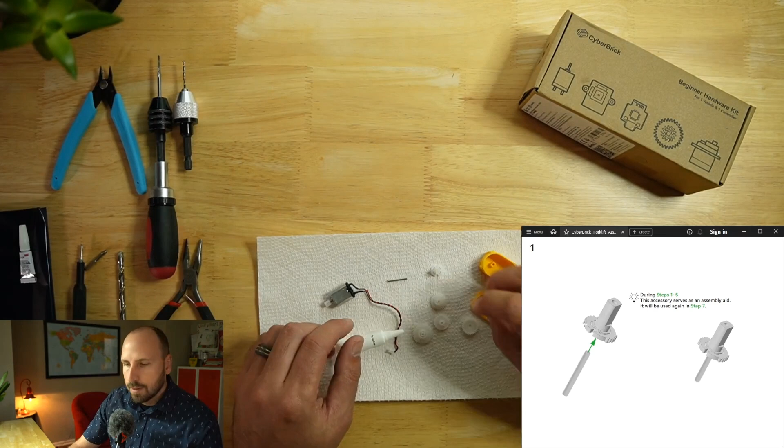Okay, we'll get started with the gearbox here. So the first step is putting together a couple of pieces. For one, we start by using this aid, put a little pin in there, and we can make sure that we completely seat this rod in the hole here in the gear shaft.

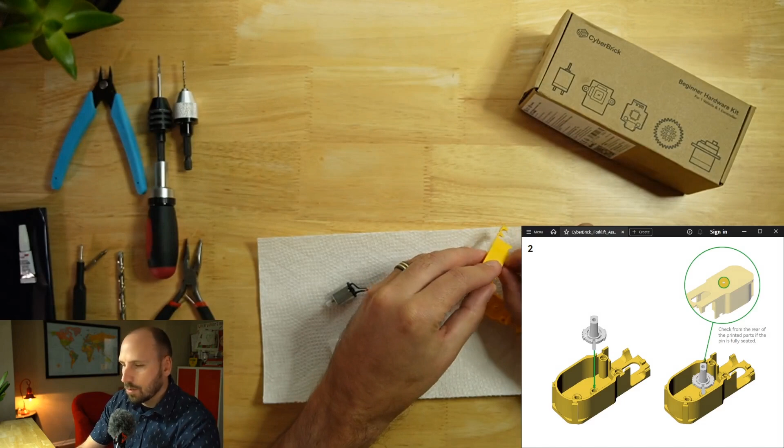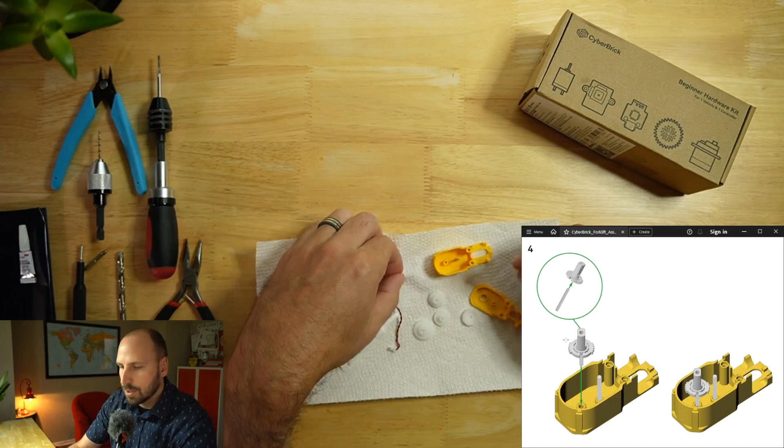Now what we found out is that it doesn't quite fit in there very well, so what we do is take this M2.5 drill bit here and drill in just a little bit. You don't want to go too far and drill all the way through. If you go all the way through, no big deal, it'll still work. And now we can also put the shaft in the second hole. This one, for whatever reason, wasn't quite as tight, but there we are.

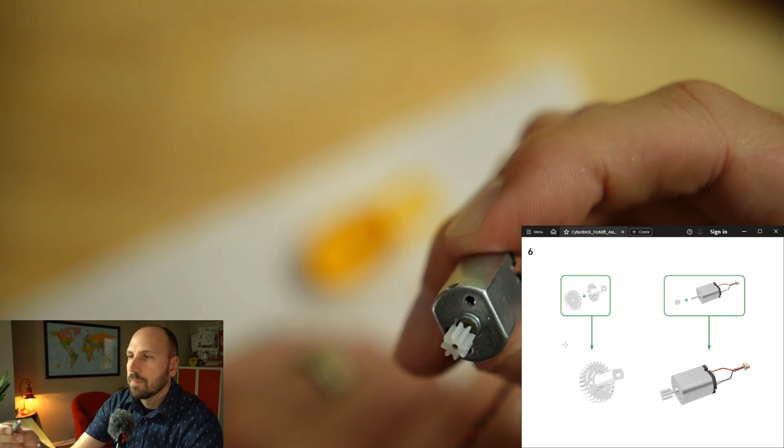Now we can put this gear that we were using earlier, we marry that up with this gear, put it together, it just fits in there. It's a bit of a friction fit. There we go. And then we have our motor, which I got ahead of myself and already put the gear on the end of the motor. It does help to just put it on the table and smash it down a little bit to get it in, otherwise it's hard on your hands and your fingers.

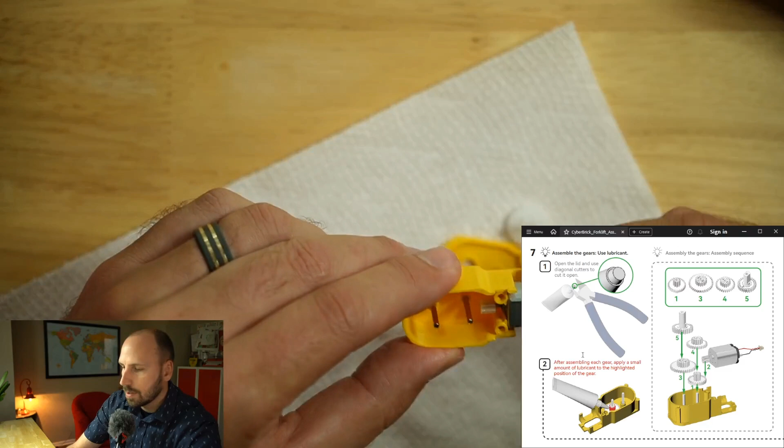Going on to step 7, we have our lubricant, and so we can start assembling this motor. So the first thing I do is put the motor in there, and then with the lubricant that comes, I just put a little dot right on the end of the gear, and as the gear turns, it will cake around the rest. This gear actually should go in first, it looks like. So take that back out, put that gear in first, then we will put in the motor, then we take the larger gear and slide it in.

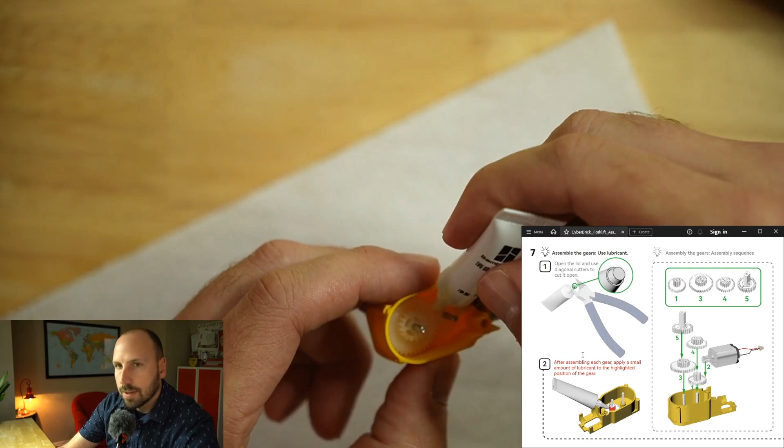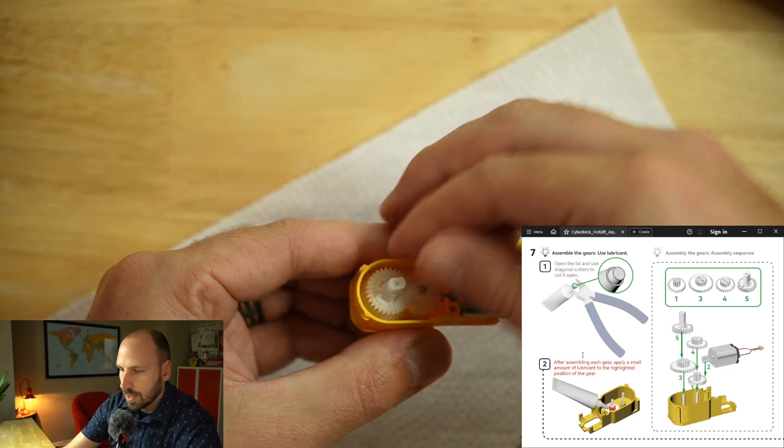And while these two gears are exposed, we'll take this grease again and just put a little dot, I know it's hard to see, wherever gears exist, just to make sure these are lubricated. This is a very important step, don't skip it, otherwise you'll end up having a seized motor. Okay, then we take the smaller gear and put it in there next. There we go. And then lastly is this taller gear, which goes on the last remaining shaft. And then we can just, again, put a little bit of grease right between the gears. That will work its way around as soon as we turn on the motor.

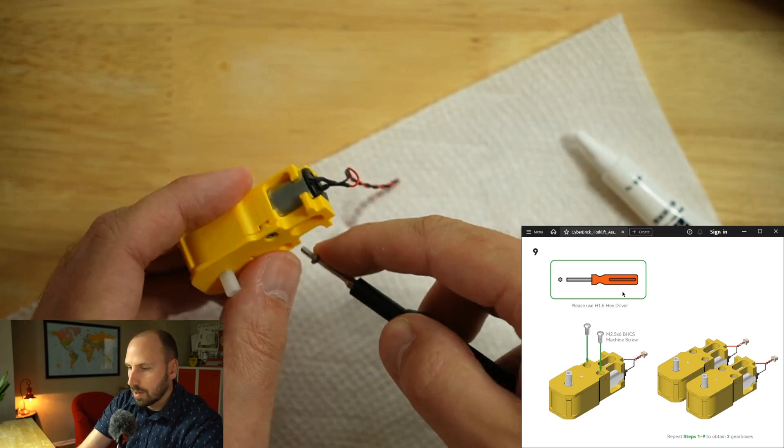Now we're going to go ahead and put the cover on here. It fits pretty snug. And then lastly, we take a couple of screws and seal that all together. We don't have to tap these holes with our M2.5 tap. The designer of this model did a very good job, to where we can actually just use, in most cases, the screws directly into the holes. There are only a couple of spots where I found it useful to tap, and we'll get to that in a second. Just tighten it, finger tight. We now have 2 gearboxes complete.

So moving on to the next step, which is the vehicle body. Starting with the chassis here, we'll go ahead and put our 2 gearboxes in. And what I find is that if you over drilled, like I said, that center shaft, it's blocked by this center support in here, so no big deal. Just seat these in here nicely. Again, the developer of this model did such a good job that the tolerances are just about perfect. Can get that settled in there.

There we go. On to step 11, we will take our top part of the chassis, and the idea is to route the wires for those two motors out through the sides here so they can just come out to the top. And then we put a bolt right down in the middle, and that's going to make sure that we have the top attached to the bottom.

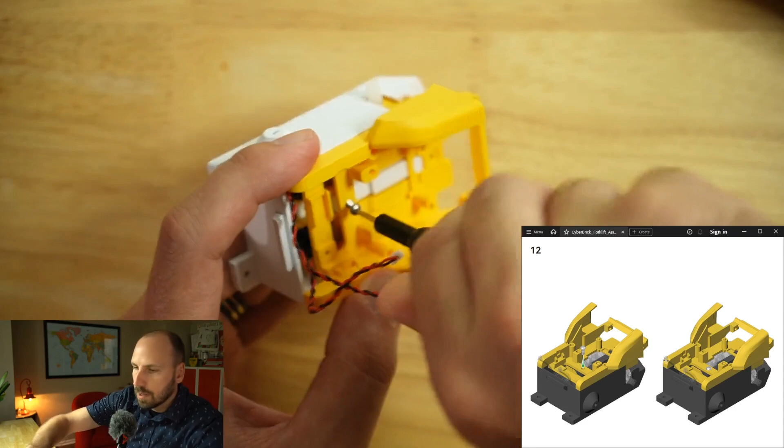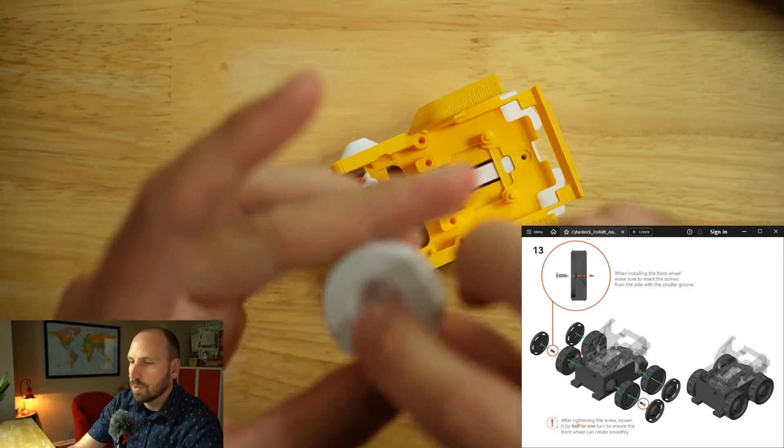Next step are the tires. Okay, get these over here. These are really cool. Each tire comes with a hubcap and wheel. They're slightly different styles. You'll notice the back of one has a large hole in it and the other one has a small hole in it. The small hole is going to go on our gear shaft, and then the one with this larger hole is going to go on the front.

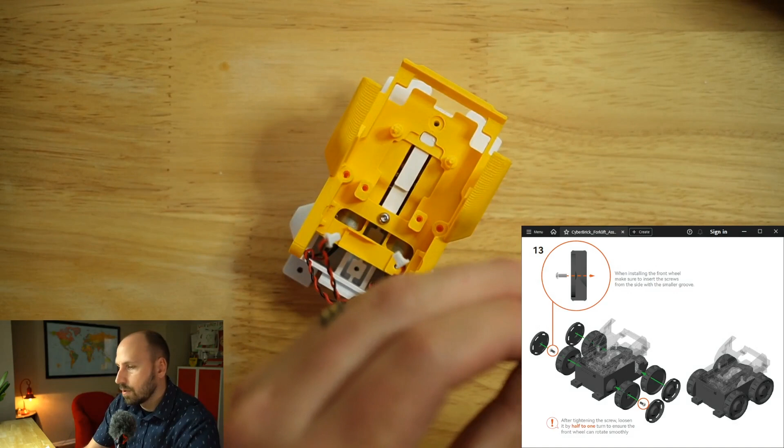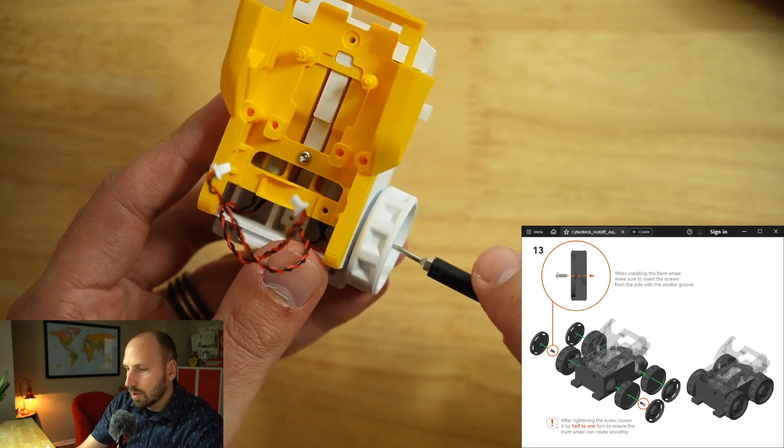Now those get attached with screws. So if we take a screw here and we take the one with the larger hole, we can put that screw through there, and we go ahead and tighten that onto that portion. So you tighten it up, and if you tighten it up too much, the wheels won't be able to turn. So the idea is to back it off. They say about a half to one turn. You want it backed off just enough to where the wheel doesn't wobble, but it does turn freely.

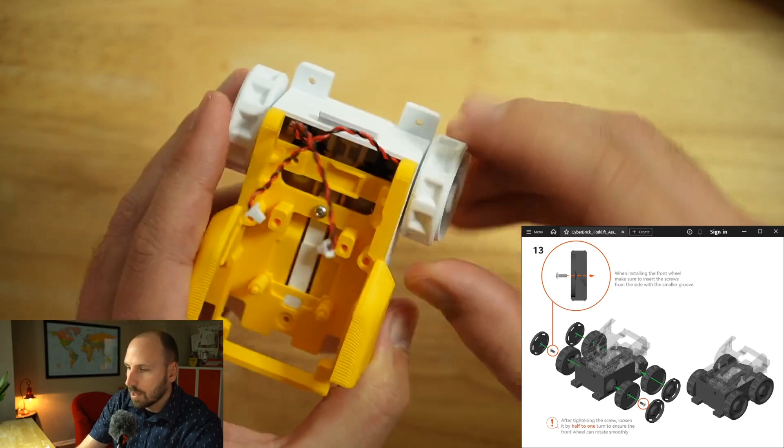Okay, we'll do that with the next tire. Okay, and then what you can do is put the hubcaps on, once you're content with how easily those tires turn. There we go. Nice and easy. And look at that, those just snap in like that. It's pretty amazing.

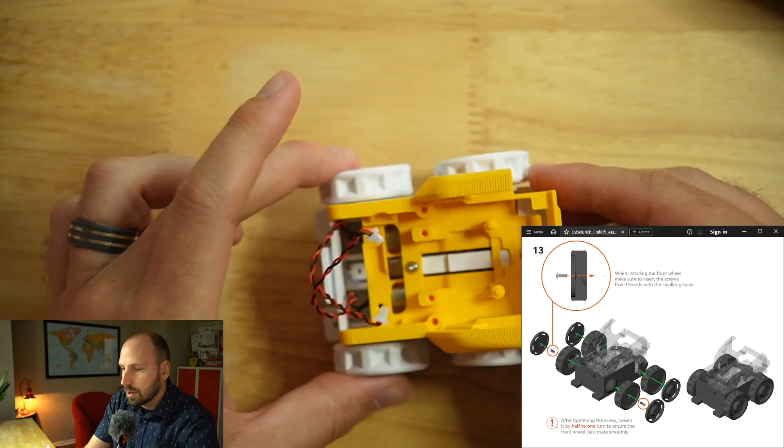Now if we look at the back pieces, same thing applies. We have this hole here, and if I push those in, you see we have the tires. We don't need the screws on the outside of those, so they just pop on like this. And they're just friction fit in. Again, incredible job with the tolerances. So now we have our front wheels and our back wheels. Now's a good time to just turn each one of those back wheels nice and slowly, just to lubricate all those gears inside the gearbox before we turn them on super fast.

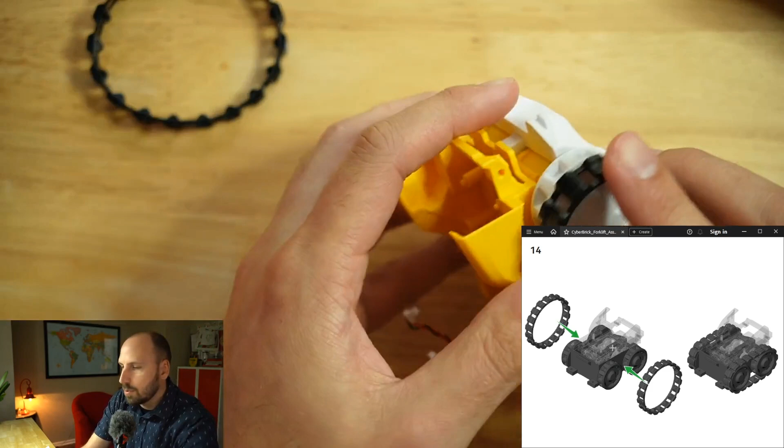This is the TPU treads. So if you don't have TPU, or if you haven't printed with TPU before, it can be a little finicky. I'm using the AMS TPU from Bambu Lab. It prints it off really nicely overall, but it is a bit stiffer than some of the other TPU that I've used in the past. So if you put it on the back tire, you just rotate the front tire a little bit, and then it seats in. So there are our treads.

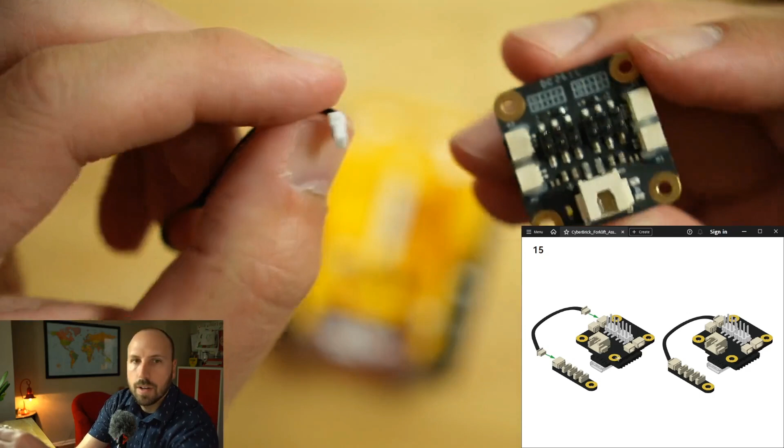Next step, we start talking about some of the electronics. So in this case, we have the receiver module, and we have an LED bar. This is individually addressable LEDs. So first we plug that in there, and then to the receiver bar, we plug this in to the side. It's really important to get all those connections to the right spot. Otherwise, you're going to find that the controller, when you hook that up, things don't function quite the way they should.

Okay, now we have the left motor and the right motor. So first, starting with the left motor, plugs into this port, and the right motor crosses over to the other side and plugs into this port. The open terminals are up, and then the latching piece, the part that latches in, is at the bottom. So they go in there like that. If they aren't going in easy, you probably have it upside down. There we go. Okay. So again, key thing to know, that's backwards on the motors. The left goes into the right, and the right goes into the left.

Okay, so looks like we can seat that down in there, and then go ahead and fasten it with a couple of bolts. Sometimes it takes just a little extra pressure to get those bolts to start threading in. Now if you're having troubles with that getting in there and you're afraid that you might be breaking it, you can take a 2.5 tap like this and just thread that using the tap instead of the bolt. And you don't have to go all the way, just get it started. And then you'll find that putting in that bolt is just a bit easier. Okay, so there is the receiver module.

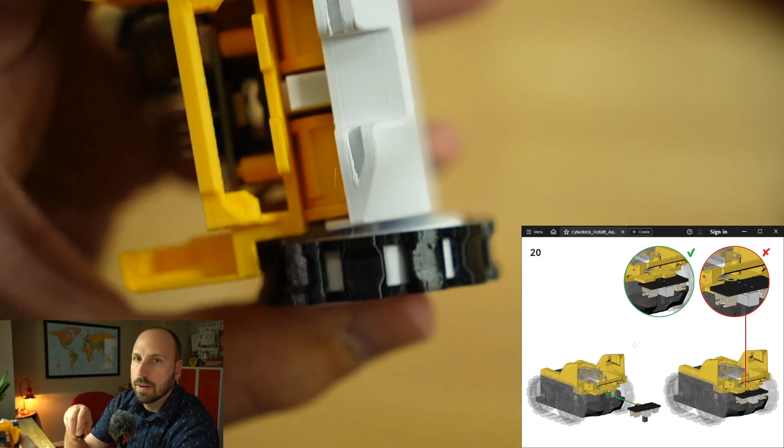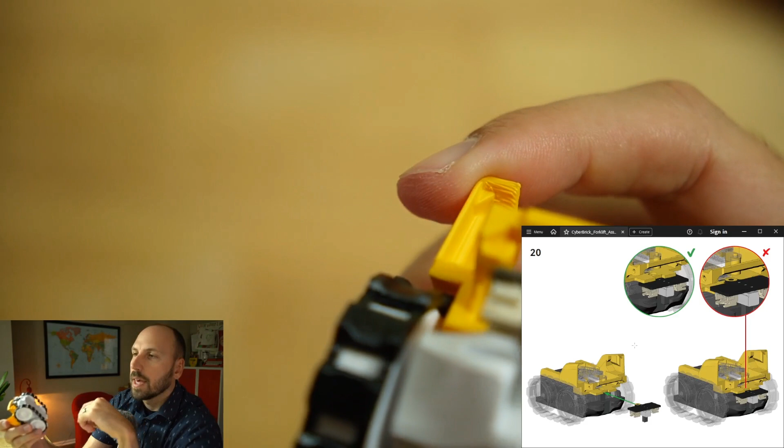Next up is the power. So in this case, you'll see that there's a little gap between the yellow and the white, that little white standoff there. That's where we're going to insert that power switch. And then you can see on the top, you can align that hole just right, and that's where we'll put the next bolt. Okay. Now the off position on the power supply is towards the front of the forklift. So I would recommend not setting it to this position, but instead pushing it to the front so it's off, just so that the unit doesn't power up until you're ready for it to.

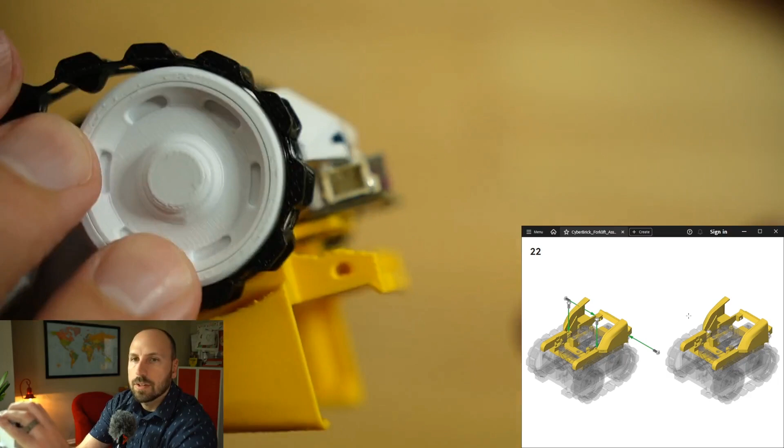Next, we have a couple of screws that are going to go in the back here. Now, if you're ever using one of these kits and they're telling you to put in a screw, but it's not holding anything together, that's normal because in a lot of these kits, they're using the screw as a magnet point, so they can put magnets in other pieces, and then those screws actually hold together a cover or something with a magnet attached. Now, a key thing to know about this particular ask to put a screw through that hole there is that the layer lines are running lengthwise.

And whenever you have layer lines running lengthwise as opposed to widthwise across a hole, you've really increased the chance of a split. If a 3D print is ever going to split, it often splits along the layer lines like this. So if I were to start putting a bolt into this hole here, I would suspect there's a chance that bolt is going to pull apart that layer line and cause a break.

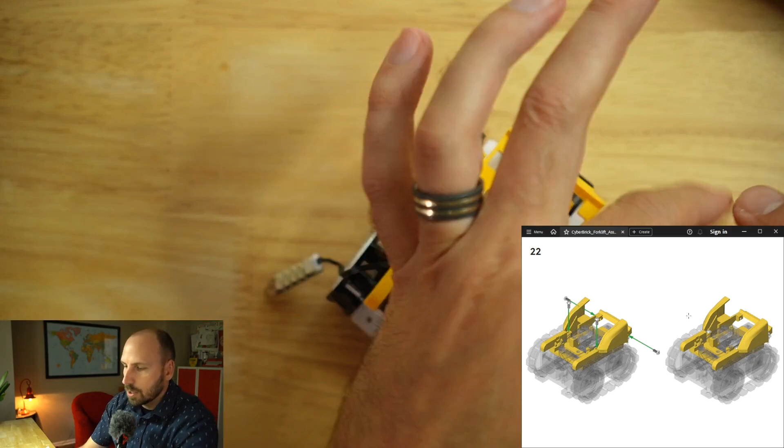And in fact, I did that earlier with a different piece, and I actually had to super glue it back together. So if it does break on you, you can super glue it back together and put the bolt back in there. So what we're going to do is we're actually going to take our M2.5 drill here and just bore out that hole just to make sure that we don't put too much pressure on it.

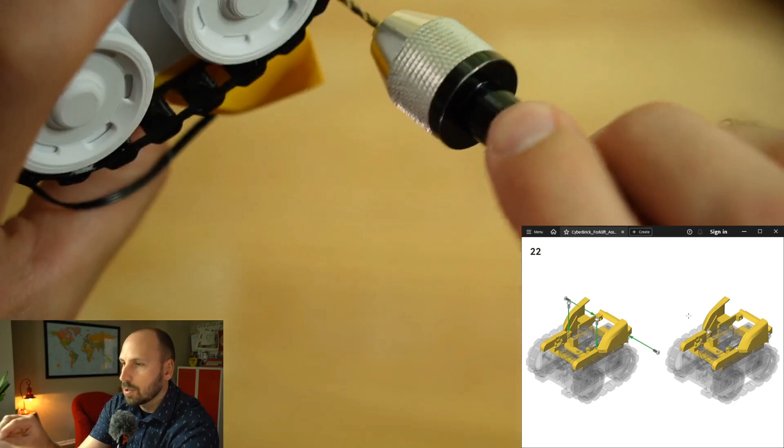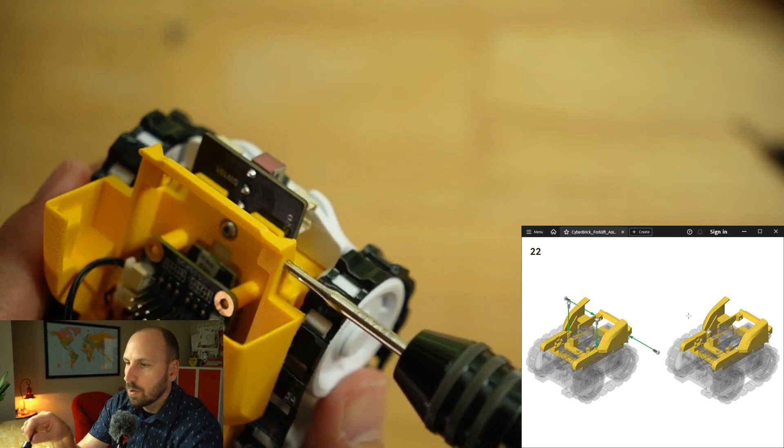And then I can take the M2.5 tap and I could pre-tap that hole in a way that doesn't build up that pressure against the layer lines and cause a split. If you end up splitting yours, no big deal, just super glue it and let it dry, and then try to do it again. That'll work just fine.

Next up, we have the LED lights. Here I've already fished those through there. You just push them through the channel. You have one on the left and one on the right, and you angle those out. Be very careful with them not to pull or push too much on the ends. Pretty fragile. I did not print off the two covers for the lights. Unfortunately, I didn't have any clear PETG, but I think they'll work just fine without it.

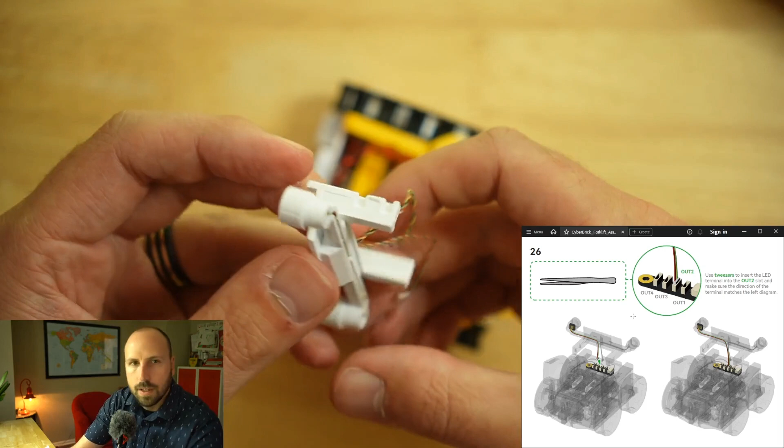The next up is we need to just thread those wires through this piece here. Okay, so let's do this. There's one, there's two. Okay, and it looks like that sort of seats in there like that. Again, just trying to keep track of which is on the right, which is on the left. Maybe I'll just wrap that around like that for right now so I can keep track of it. And then the next thing is we put a bolt through this hole in the back. There we go.

Next up, we connect our LEDs up to this LED board. So it looks like the LED board is going to fit in like this. And if we match the orientation, it looks like the LED on the left goes into slot 2, and I suspect that means that the LED on the right goes into slot 1. Okay, so those do line up appropriately.

So again, these are only going to go in one way. They do recommend using tweezers to put these in. If you do that, just be very careful not to squeeze the wires. The wires are quite delicate. Might take a little bit of trial and error to get it in. Okay, so here this is a bit of a tricky spot. I guess this just goes in here for right now.

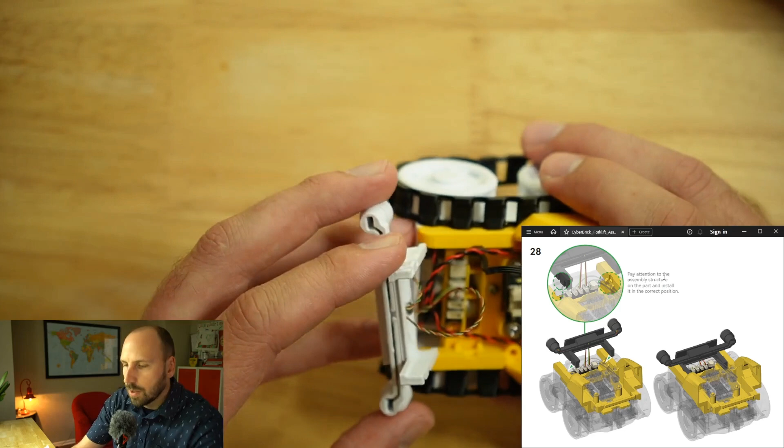So the LED lights, you want to point them forward towards the front of the forklift like this. And then you'll notice that there are little slots in this white part. And then there's a little slot in the yellow part here. You want to line those up. And then this piece just clips in, kind of like a seat belt. So you can see how that goes in there.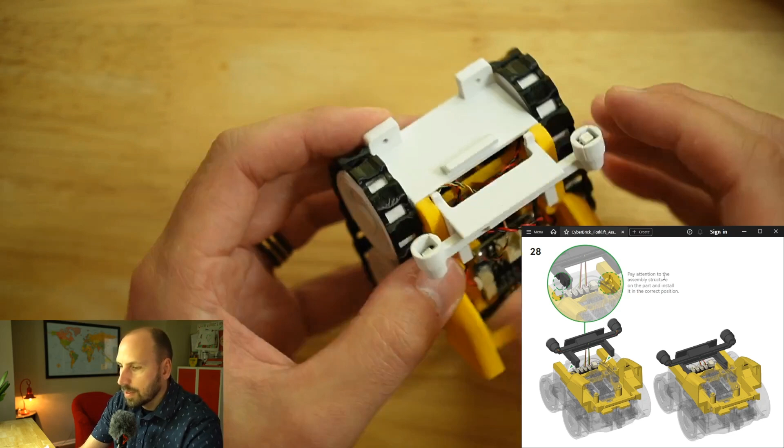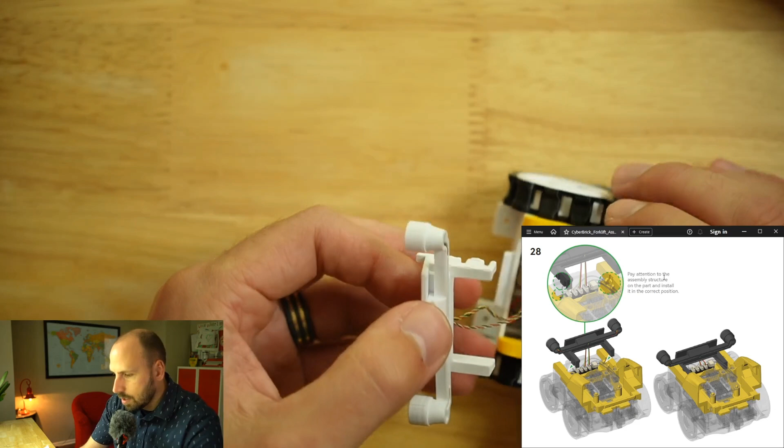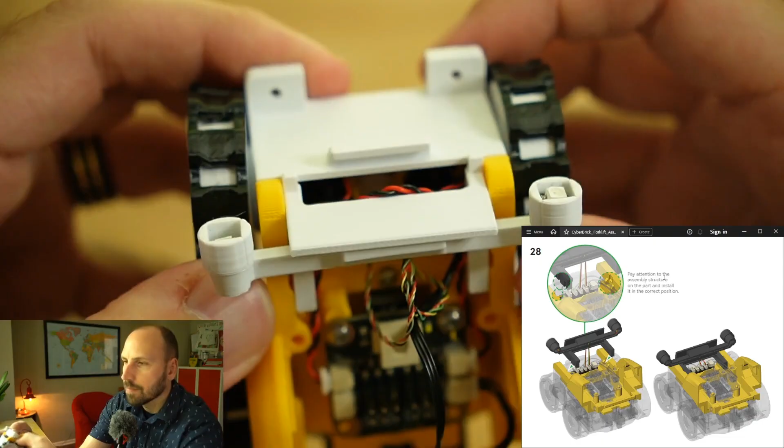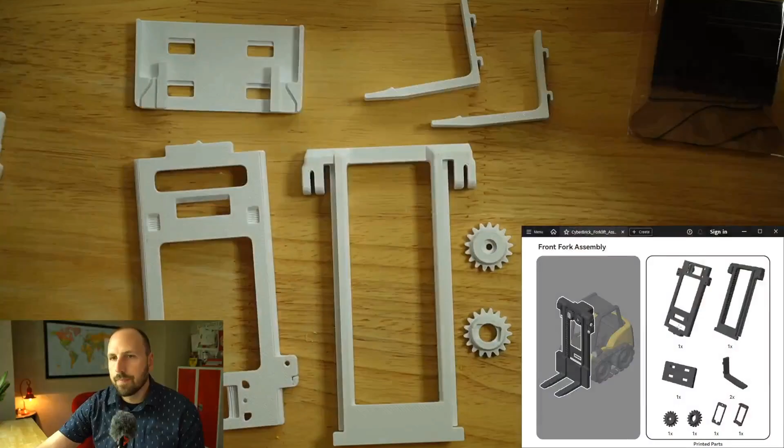Next up, we're going to assemble the front fork assembly. And one key thing to know there is that there's two different types of servos that came with the Cyberbrick kit. One servo is a regular servo, just says 9-gram servo motor. The other servo is a 360-degree servo. We want to use the 360-degree servo. So make sure that's the one you're using in the next few steps.

I'm going to take these two pieces and click them together. This is just a friction fit piece. If you have trouble getting those in there, this is a good time to use the needle nose or another pliers just to get that seated fully. So I'm going to get that to where there's no gap in there.

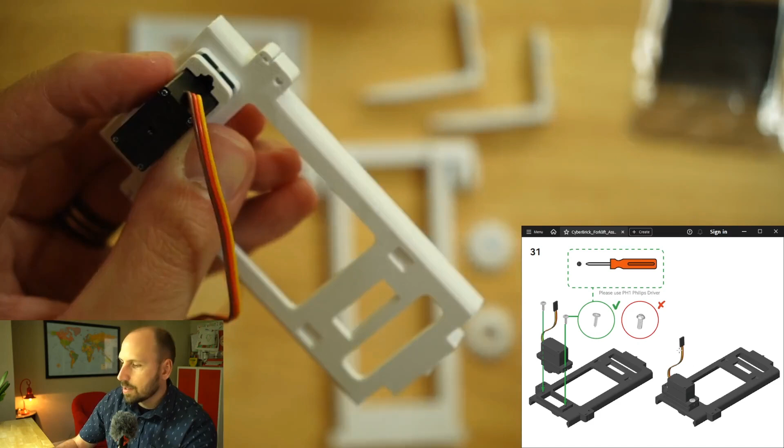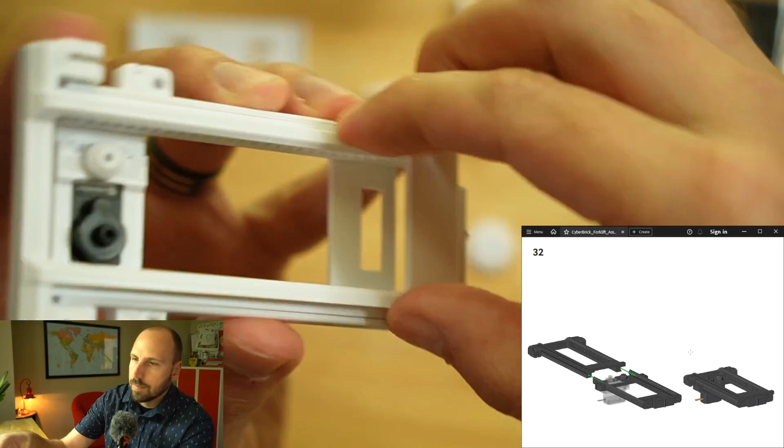Okay. Next up, we will take our servo motor. The servo does come with some screws for tapping. So you can put those in there, and then you'll need to use your Phillips head screwdriver to get those in there. Next up, we will take our longer assembly arm and we slide that in from the servo side down. It slides in just like that. From there, in your servo kit, you will find a servo arm that looks like this.

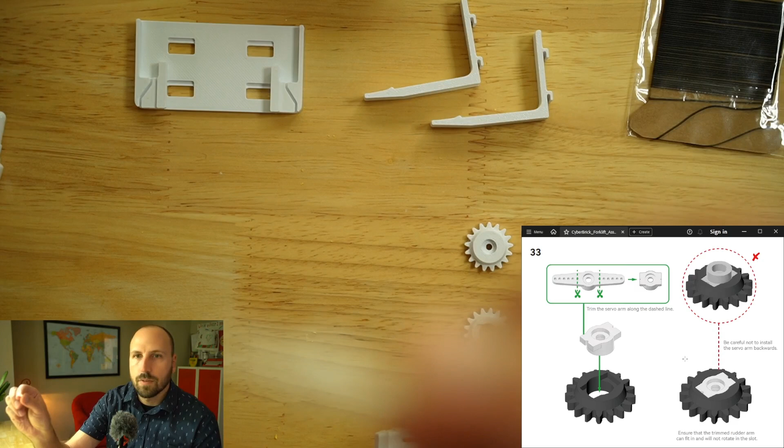What we're going to do is we're going to take our cutter and we're going to cut that very first hole off. So if I do that on both sides, and then you take the gear with a slot in it and you just push that together, and then you end up with that little plastic piece wedged into that gear.

Okay, next thing, we go ahead and mount that on top of the servo. You can press fit that in there. And then again, the servo kit came with a small screw. You can use that and go ahead and use that Phillips head screw to attach that gear to the servo. Okay, so there's the completed

servo install. We have the other gear here that we meshed together, and for this we do use a normal M2.5 that we've been using the rest of the kit, and our H1.5 hex bit. Go ahead and tighten that gear down. Now this gear we want to have loose but not too loose to where it wobbles. So I tighten it up and then I loosen back just a little bit to where it's free to turn but not wobble.

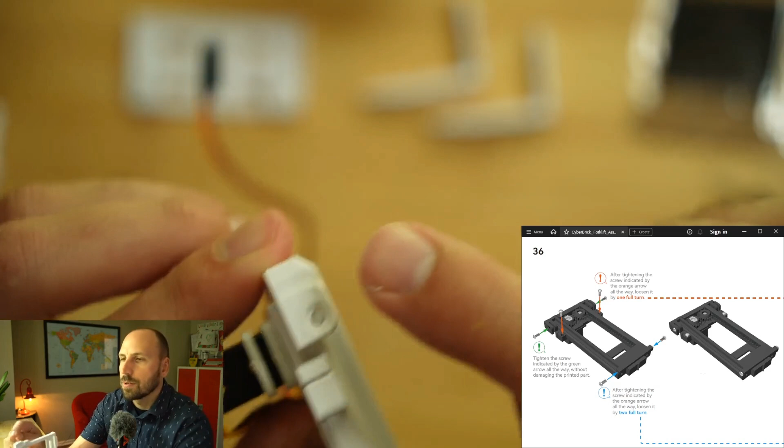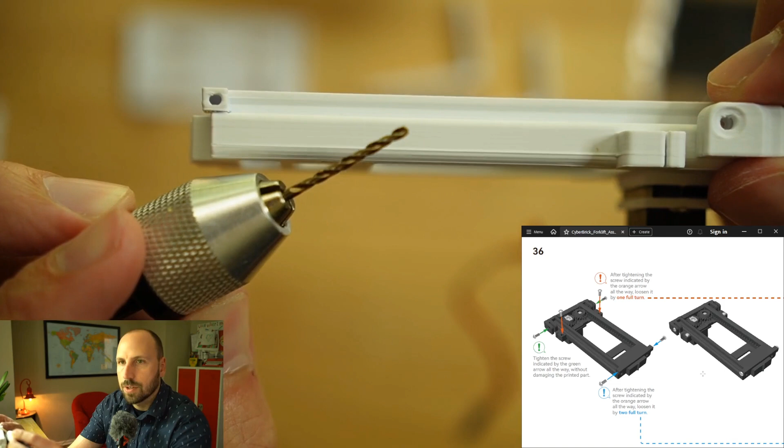Alright, next up we're going to install several screws throughout the assembly here. We have a screw that goes in here, these two holes, as well as these two holes down here. Now again, as I mentioned earlier, these are going against layer lines. So when we put something against a layer line, I almost always use my M2.5 drill bit and just make sure that there's no external forces. So I'm going to go ahead and install those. Okay, so for each one of these, make sure that those are not going to strip out or break the layer lines.

And on this here, you just tighten it up to where it stops. We're going to put some thread through that in a minute. Same with the other side, we're just using that as an anchor point for thread to route through. Leave a little gap in there so that we can run some thread through it. Same with the other side. And then leave a little gap on the screws here at the bottom as well. Just a little visible gap there, maybe about the size of the head of the screw or the bolt.

Next up is some nylon thread. So we open up this and it says to do about 30 centimeters long. You do not need to be exact with that. Basically that equates to 3 wraps of this. 1, 2, 3. And then I'll cut another strip. 1, 2, 3. And it says to tie a knot at the very end of each piece of thread. So we'll do that like so for thread number 1, and then we'll do that for thread number 2.

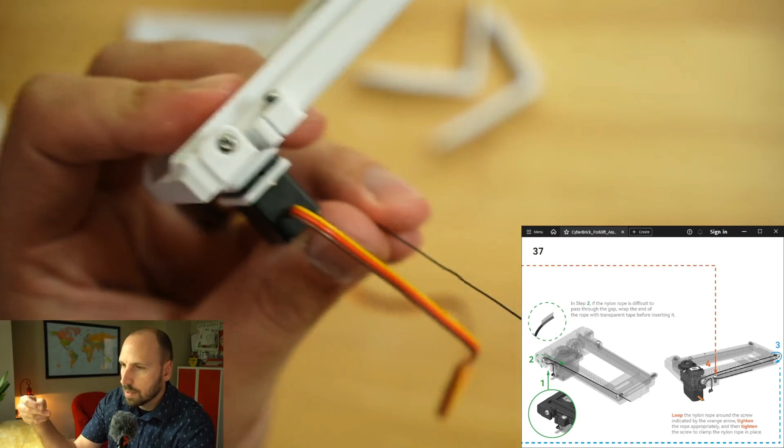There we go. It looks like that part with the knot goes there, and then we're going to actually thread the other side through this slot here, pull it out the other end, and then we wrap that around the bottom and then back up around this bolt. And if I can manage to get it on the inside without binding that other thread there, that's how it unfolds. And that's where you see we had plenty of extra thread on here. And then we can tighten the rope, just hand tighten, and then we can tighten this bolt to hold the rope in place.

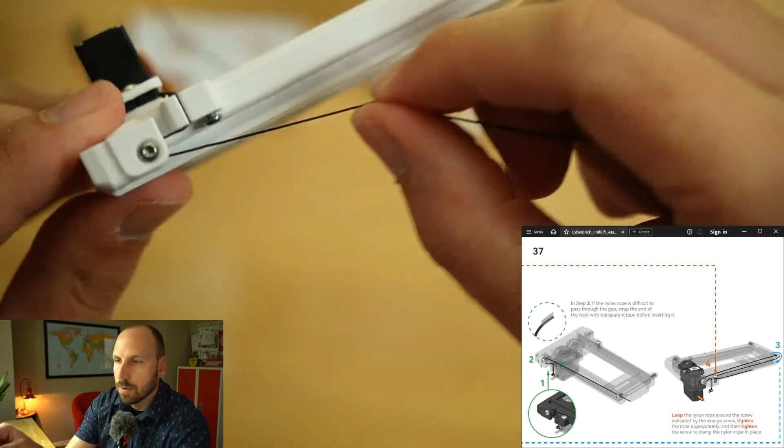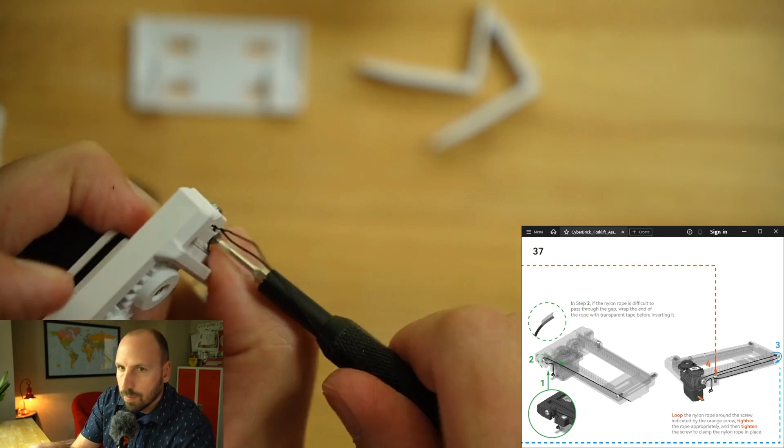Okay. And we'll repeat with the other rope. So if we go through here and then around the back side through the front, then we go down the front and back up and around this bolt. It's a little tricky to get that wrapped around the bolt. I think if maybe we loosen it up just a little bit, it'll be easier to get underneath the head of that bolt. There we go. Okay, and then we can go ahead and tighten that bolt up. If you tighten too much, you might tear the thread, but that's now both sides assembled. And then what we can do is use our flush cutter to clip off the extra thread.

Now we do the front fork assembly. So if we look at the assembly here, we don't use the back side of it, we use this side here. And then it looks like the forklift tines go through like that, and then they can snap in just like that. Then it asks us to, again, orient the set like this. Then this has these little hooks on either side of that forklift trolley, and those just snap in to either side of the

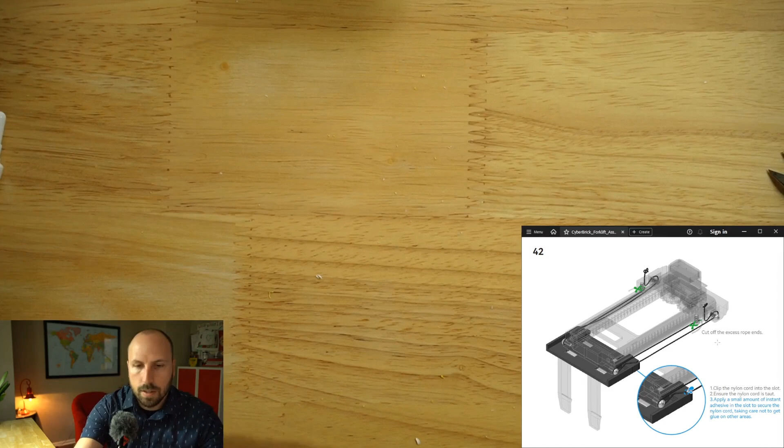lift assembly. And it says to push the fork all the way down, and then those wires that we had earlier, we will actually take the wire that's running up to this bolt here, and we're going to run that through this little channel, just like that. Same with the other side. And then it says to use a little bit of super glue to keep those together.

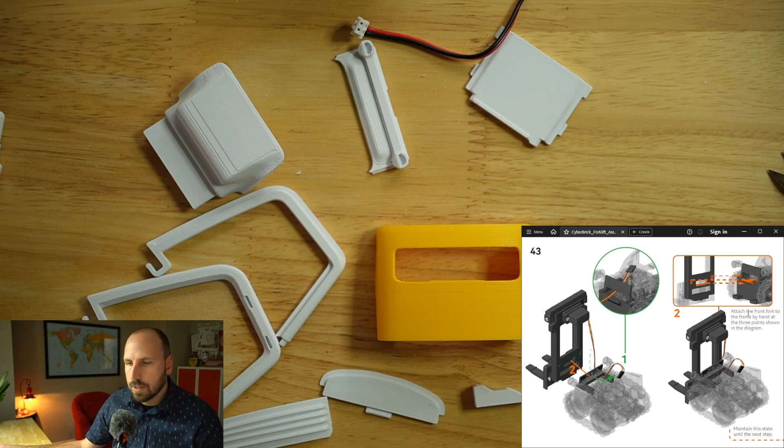So with super glue, I always put something on the table to protect the table. And then we just do a little dab of super glue in each side, just to hold that cable in place. Again, make sure you have that forklift assembly all the way to the bottom, and then we'll let that super glue dry.

Okay, so the front fork attaches and runs through the hole here. So if I take this front fork assembly that we just finished, and I take the servo piece, I just run that through this front, up and over that LED junction, and run it the rest of the way through. And then I could take this front fork assembly, and you can see how there's a hook on the front of the vehicle and a hole in the fork assembly. You can just slide those together like that.

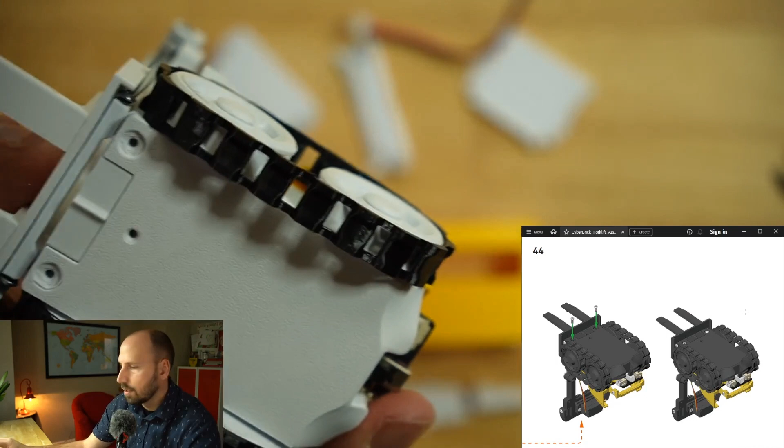And then we'll end up holding that on underneath with a couple of bolts. So put those in there. 1 and 2. There we go. 2 bolts in the bottom. And now our fork assembly is locked on there.

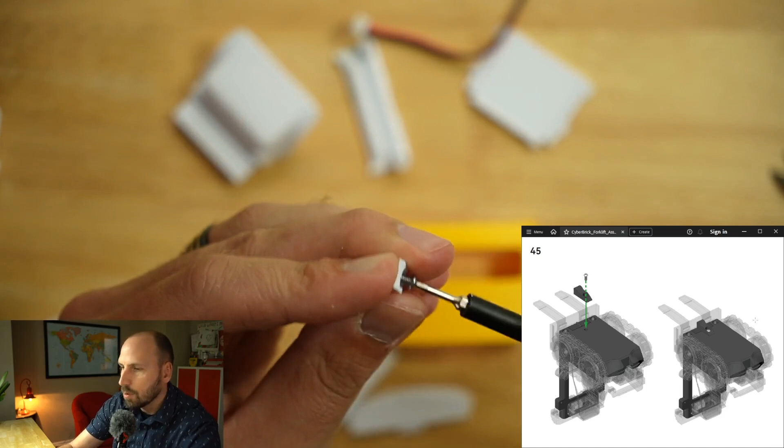And lastly, we have a piece that I think is for preventing the forklift from tipping too far forward with a heavy lift. So we can put that on there as well. This helps to have 3 hands for, but we'll get it in there. So it just screws onto the bottom. Nothing fancy. Again, I think that just keeps the forklift from tipping forward.

Okay. Next up, we connect our servo. So the yellow wire goes to the back right spot of our control board. Okay, next up, we're going to route the power wire around. So we'll plug one part of the wire into here, into the front of our circuit, and then it says to route the other wire down and around the back underneath this piece of the kit right here. Okay. And then we're going to plug that into this side of the harness. Okay.

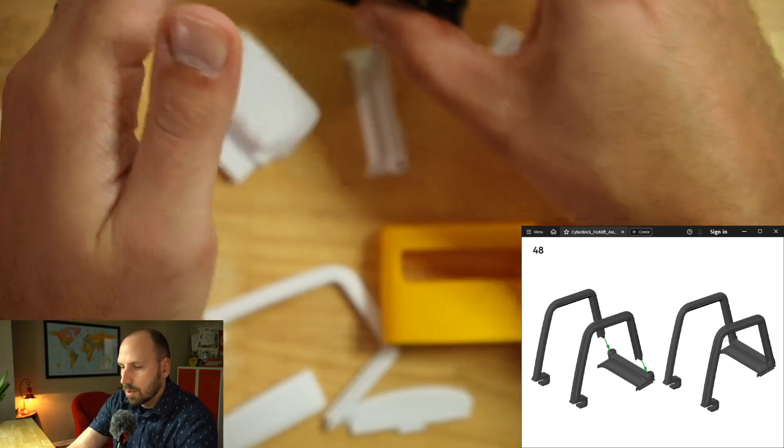Next up, looks like we're going to assemble some of the cab. So we start with making sure that these little slots are on the interior sides of the cab. Then we take our back piece here and, look at that, they even designed it so you can't click that in the wrong way. Friction fit is just amazing, where things just go together. You don't even have to have glue on them.

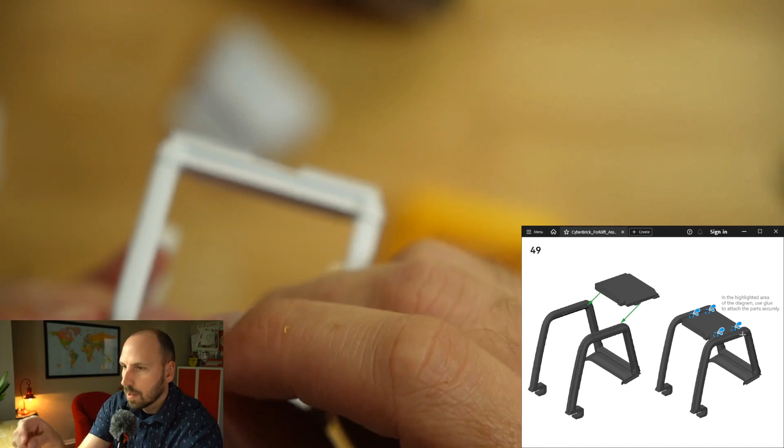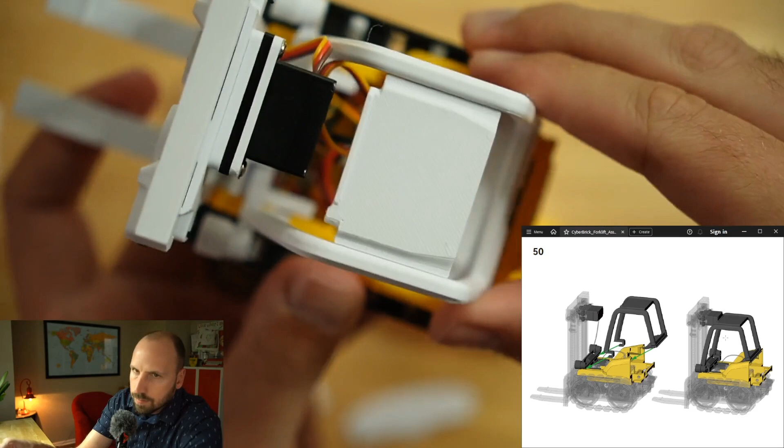Okay, then we put the top piece in. This one we will use a little bit of glue. Looks like this piece with the bump goes towards this side. Okay. And we'll put a little bit of glue on those pieces. Okay, and we'll hold that together. Next up, it looks like we install this onto the top of our structure here. It just slots in there on the back, and then the front. See how that just clips around that light bar up there on each side.

Okay. Next up, we have our electronics cover. So this cover is going to go over that centerpiece there. You'll notice they're asking us to put a couple of magnets using super glue into those 2 holes. Those 2 holes are going to line up with those 2 bolts that we put in there earlier. And that's actually how the cover stays attached. So we'll go ahead and put those magnets in there and glue those in. Okay. There's the 2 magnets installed.

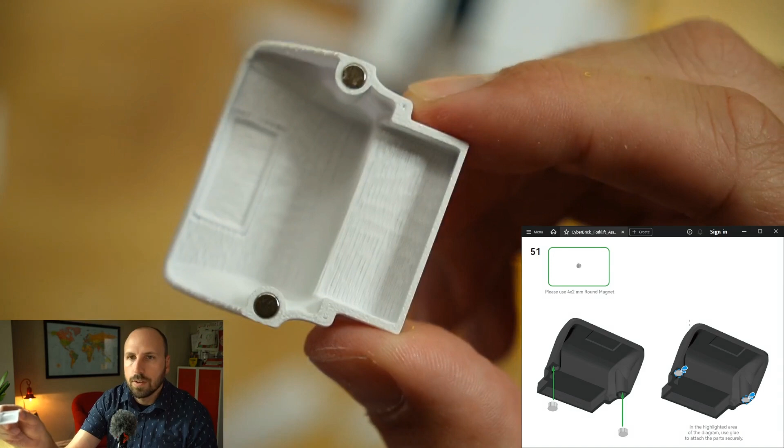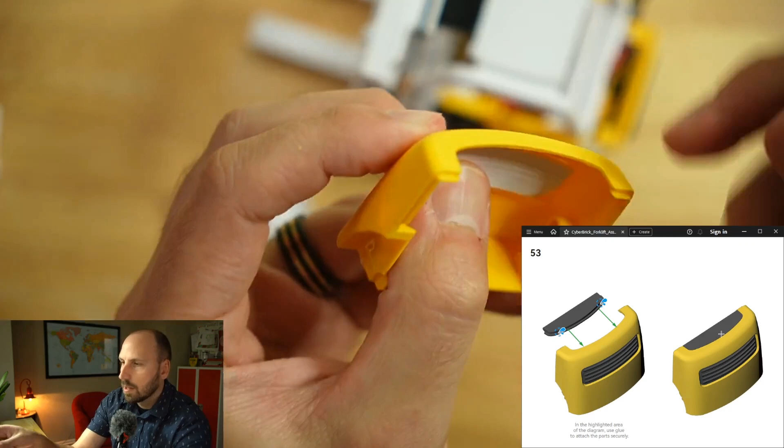And then we'll do a little bit more gluing. We're going to take this back shell and this piece here, and install them into here. So we're going to take this like this, and then this like this. Put a little bit of glue on that. So we'll glue those in. Okay, so now we have those glued in there. Nice and tight, nice and snug.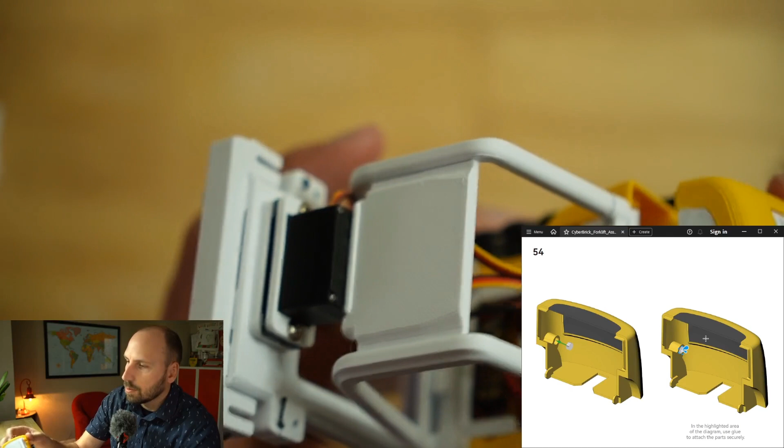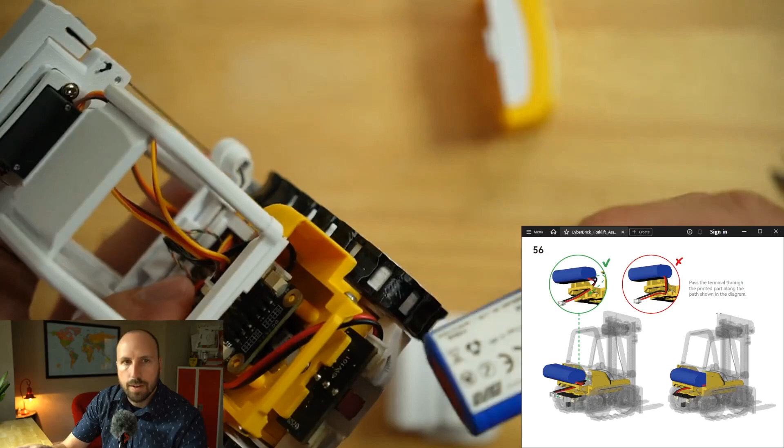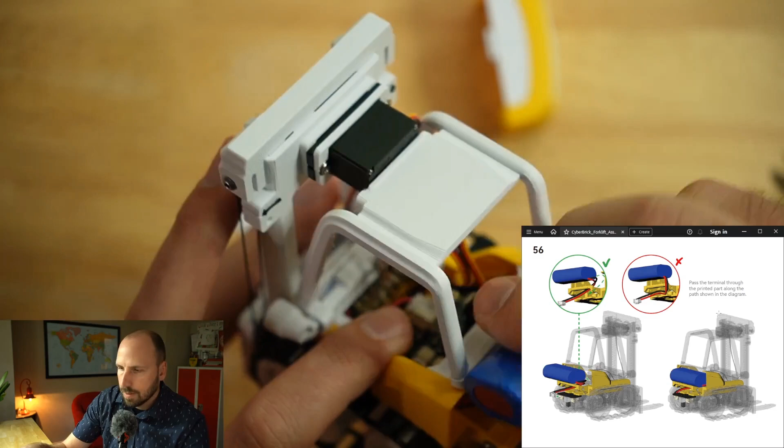Okay, next up, we'll install some magnets, which I already did while we were off camera. So you see the magnets in there. As I mentioned earlier, it's very cool how they use just screws and magnets to keep pieces attached. All the glue is dry, so we go ahead and install the battery. So it says to turn the battery this way and then have the wires run underneath this cavity here. And again, make sure that switch is forward before plugging the battery in. So the battery just goes like that.

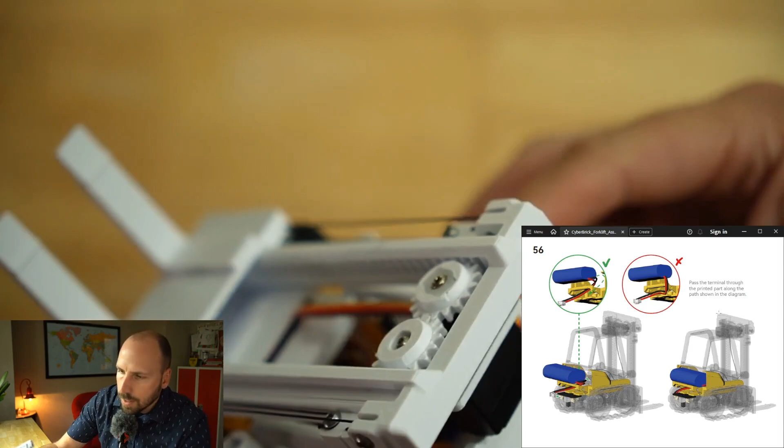And then if all works well, this back cover can then just slip right in. Then we can do a little bit of cable management and push some of these wires down here like this, and then we can place the cover on top. And there you have it, our completed forklift. Now the only problem is we can't do anything with this until we make a controller, so stay tuned for that.